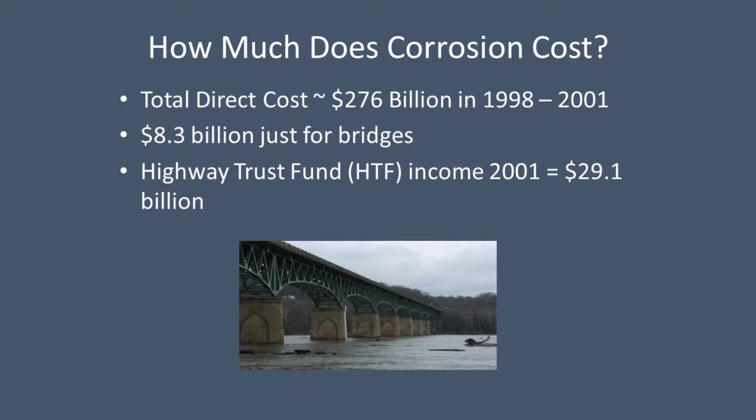So first of all, why are coatings important? Probably most people in this room have seen these numbers. Total direct cost of corrosion was somewhere around $300 billion between 1998 and 2001. Of that figure, $8.3 billion was just for bridges. My understanding is the Highway Trust Fund is about $30 billion, so some quick math there, you see that bridges are almost 30% of the whole trust fund. It's a big deal, and from a cost perspective, it gets very obvious why we're spending money here.

The scope of the domestic scan, what were we tasked to do? Let me back up just a second. This was an NCHRP scan tour sponsored through TRB. We had Federal Highway participate on the scan tour, and I'll get into that some more, but I wanted to give you the structure of the scan tour, who was behind it, who funded the collaboration. Essentially that was the Academy of Sciences, Federal Highway, and the TRB.

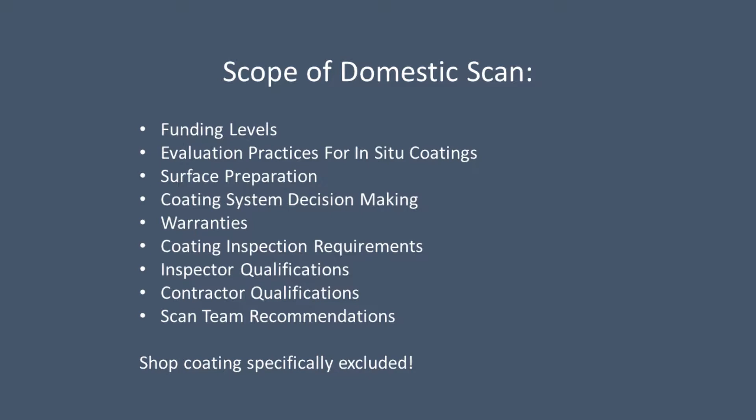So anyway, the scope of the scan, what were we looking at? We were looking at funding levels, evaluation practices, surface preparation, coating decision-making, warranties, coating inspection requirements, inspector qualifications, contractor qualifications, scan team recommendations, and we specifically excluded shop coating.

I don't even remember why, but it makes sense to me. Shop coating, it's the lower fruit is the maintenance painting. At least in Florida, we're getting pretty good service lives out of our shop painting. It's the maintenance painting that this scan tour was focusing on.

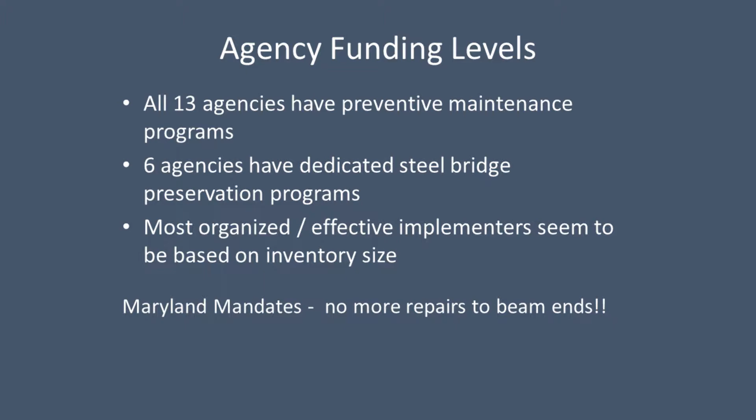So the first topic, agency funding levels. All 13 agencies have preventative maintenance programs in place, not a surprise. Six agencies have dedicated steel bridge preservation programs. The most organized and effective implementers seem to be the ones with the biggest inventory. Kind of common sense, actually.

Maryland has mandated no more repairs to beam ends. I'm not sure how it's good to mandate it, but did they get there? I don't know, we'll have to ask someone here from Maryland, but that was one of the things they were trying to accomplish during the scan tour, which was about two years ago.

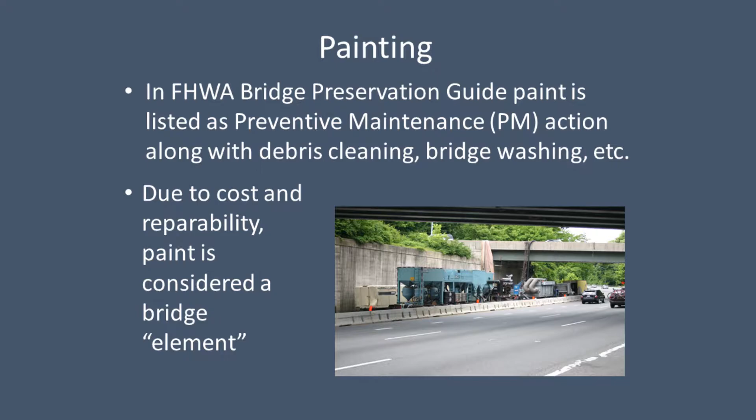Painting: due to the cost and repairability, paint's considered a bridge element. That's surprising to me, I did not know that prior to the scan tour. In the Federal Highway Bridge Preservation Guide, paint is listed as a preventative maintenance action, along with debris cleaning, bridge washing, etc.

So what practices were out there for in situ coatings? Well, all state highway agencies performed assessments prior to making any maintenance decisions by following the National Bridge Inventory regulations. It's required every two years that the bridges have to be inspected, with biannual in-service bridge safety inspections done by all the agencies that participated.

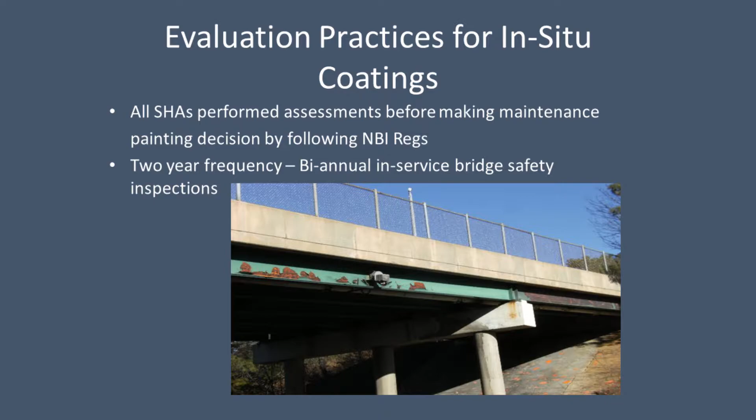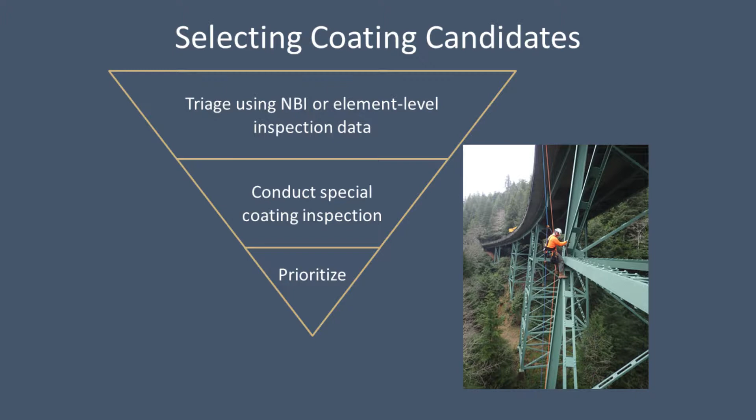How did they select coating candidates? Well, they used triage via the National Bridge Inventory or element level inspection data, conducted special coating inspections, and then prioritized which structures were worst and how much money they had.

So first of all, the element level inspection data. This was an important nugget - some of the agencies were very detailed with their inspections. They had element level ratings across a bridge. Instead of an area or even a whole bridge, they were rating individual elements, putting them on the plans, and using that information to make maintenance strategy decisions.

So Oregon rated the condition of the entire superstructure coating system on an element by element basis. It was impressive.

Virginia, the condition of the beam ends and beam end coating systems - just different ways different states approached things.

Overcoating was one of the topics we discussed in the previous presentation. The general gist was that most agencies are moving away from it due to environmental and safety regulations, cost advantages, and the amount of risk. I remember one statement: if you're going to have to do containment, then your cost is going to be almost the same as doing a full removal and replacement anyway.

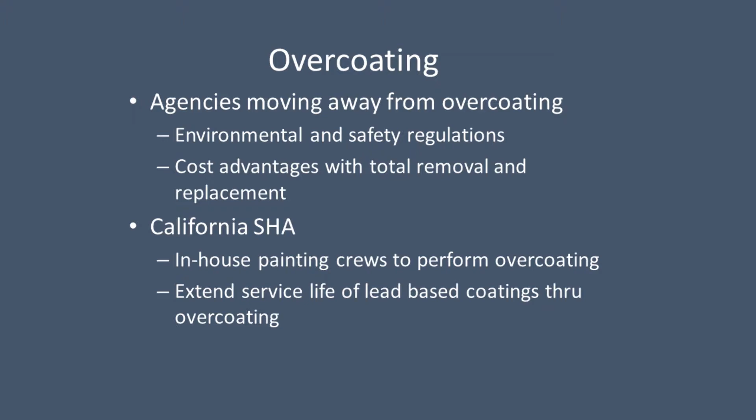California, Caltrans, had one thing very different than anybody else in the Scan Tour - their lead-based coatings. They were doing their best to extend the life of their lead-based coatings. They figured it's better to leave it in place and let it work as long as it'll work before removing it. Can't argue the logic.

It was unique - they are also using in-house painting crews to perform overcoatings, and Caltrans formulates their own paint.

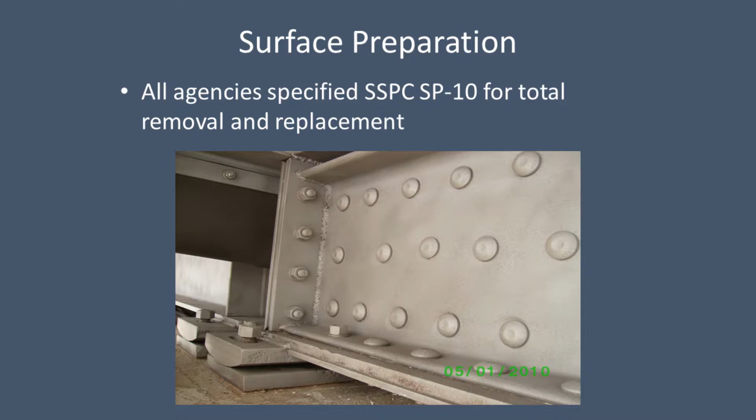Surface preparation: all agencies specified SP10 for total removal and replacement. Across the board, everybody participating used SP. It varied for spot and overcoating. All used Guide 6 for containment. No big surprises.

This is another nugget that really came out of the Scan Tour that, at least to me, appeared to be very beneficial - Oregon was using ultra-high pressure washing to remove pack rust. They're getting into their bridge bearings and things with ultra-high pressure water to knock out the pack rust and get the salts out of it prior to any other surface preparation. From the pictures we saw and the results we heard about, that was a very successful practice.

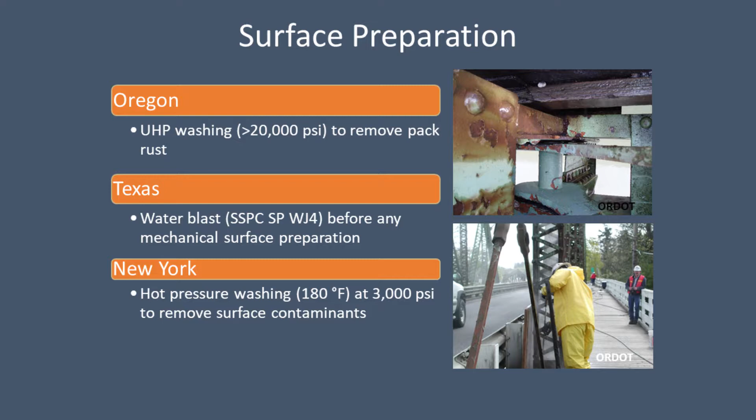Texas is water blasting before any mechanical surface preparation, and New York is actually using hot pressure washing at 180 degrees Fahrenheit to remove surface contaminants.

So how do you do the coating option decision making - what are we going to do, what coating system do we want to apply to this bridge? Well, nationally, the 3-coat zinc-rich primer is the workhorse. That was very evident from the Scan Tour, that that's predominantly what's being used across the country.

There was talk about ultra-weatherable coating systems - your siloxanes, your polyureas, your fluoropolymers, and several others out there. The team was more or less frustrated that there seemed to be new technologies out there that had not been well vetted, and we just didn't know whether we could use them or not. They weren't tested in laboratory or field testing, and even though the rumors on the street are that these coatings are very, very good, it's hard to specify one without a good independent lab evaluation.

Metallizing - New York and Ohio have been doing metallizing for many years. They seem to be ahead of the rest of the pack. They had good results and reported good things to the scan team.

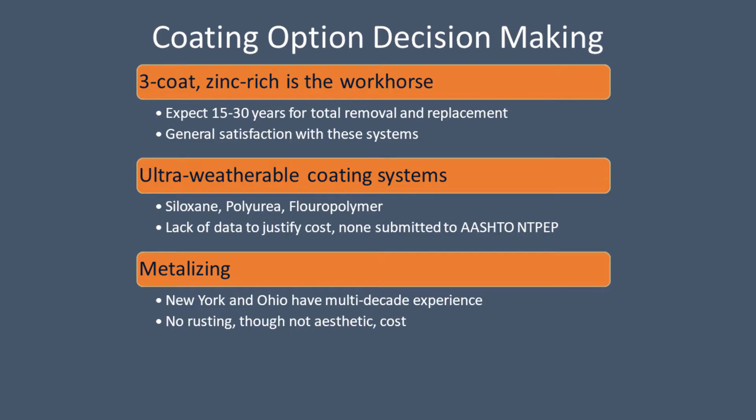No rusting, and some of these were not being top coated - just metallizing the steel and not putting a duplex system was not applied. So that's why it says not aesthetic.

Warranties were another one of those nuggets that came out of this, that seems to be a very good contractual mechanism or tool to help ensure quality.

I don't know if warranty, Jeff, does warranty fall into QA or QC or both? Well, basically, it's all QA, QC, but the thing is the warranty is the contractor exhibiting a certain amount of confidence, and he's buying into it, therefore hopefully getting a better project. Yeah, the contractor's taking on responsibility, yes. And I was kind of leading you on, but I thought it's both. It is both - it's contractor quality control and owner quality assurance, both.

Here's the states: Maryland's using a 2-year warranty, about 25% of the total project value. Oregon was using a 3-year warranty, 90% of the coating line items. The Golden Gate Bridge Authority had a 5-year warranty, and Ohio had used a 3-year warranty in the past.

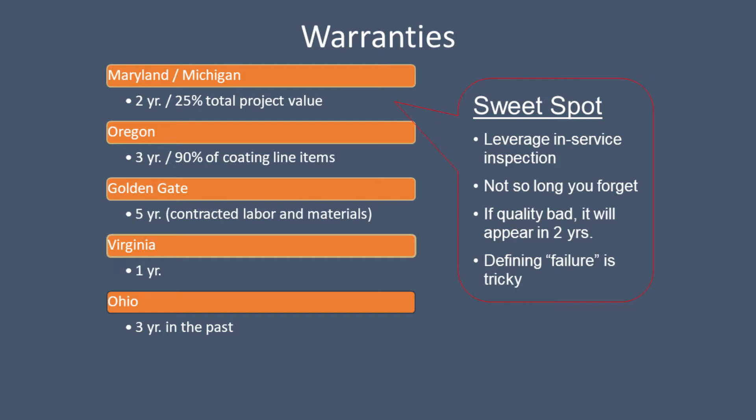Now, talking to the scan team, the sweet spot was agreed upon to be about 2 years. It leverages in-service inspection - it's not so long you forget about the structure, but yet it's quick enough that you can get out there. It is long enough so that you would expect to see premature failures if there was something wrong.

Warranties require the agency to get out there and inspect before the warranty expires. That was one of the challenges - which agencies have personnel to just track warranties. I think Mr. Blanchard said this morning we have 12,000 bridges, so think if you had 12,000 warranties, or even some proportion of them, you're talking about a significant manpower investment.

So be it. Maybe that's a good thing. You know, maybe that needs to be done. But...

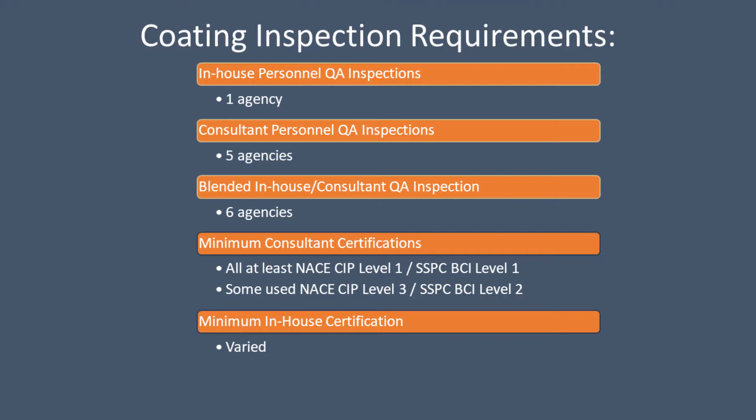Coating inspection requirements: in-house personnel QA inspections, 1 agency. Consultant personnel QA inspections, 5 agencies. Blended, 6 agencies. Minimum consultant certs, all agencies required some level of consultant certifications, NACE CIP or BCI, SSPC, BCI being the 2. And then minimum in-house certification, that just varied by agency.

Coating inspection requirements, hold points. That's sometimes, a lot of times, overlooked. One of the things the scan team felt is that hold points should be maximized and utilized to ensure quality, 100% QA inspection. In other words, get out and do your 100% inspection before your contractor demobilizes. Once the contractor's demobilized, you think he's coming back out? Not likely. So get your 100% inspection in prior to your contractor demobilizing.

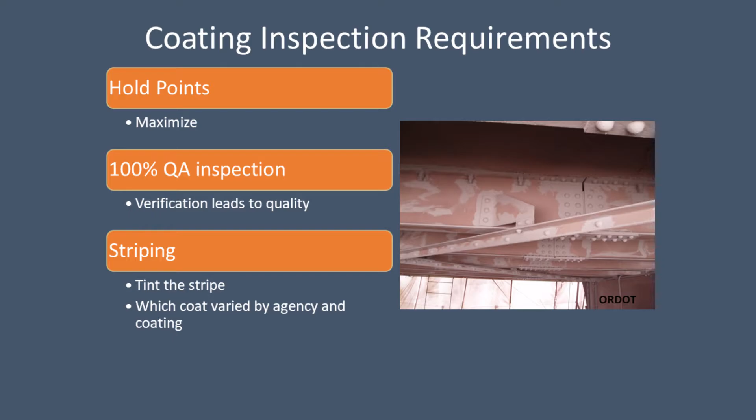Stripe coating was another one. Some agencies weren't stripe coating. Some are stripe coating the primer. Some are stripe coating all the coats. But in general, what came out of this was that the stripe coat needs to be tinted so you can get a contrast and inspectors can clearly tell that the stripe coat's been applied. Which coat varied by agency and coating. The scan team didn't really like wet-on-wet stripe coating, felt that was not a good practice.

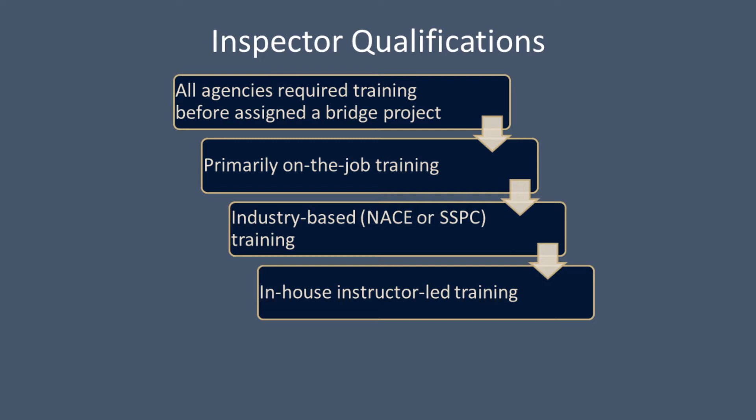Inspector qualifications: all agencies required training before going out on a bridge project, primarily on-the-job training and industry-based, being NACE or SSPC, and in-house instructor-led training. Contractor qualifications: 9 agencies required QP1 and QP2, 3 agencies required QP3, 1 did not require QP at all, and 1 agency allowed SP7, or QP7, I'm sorry.

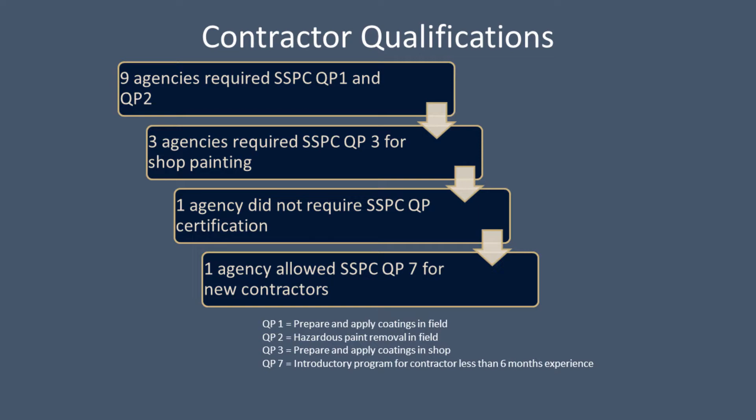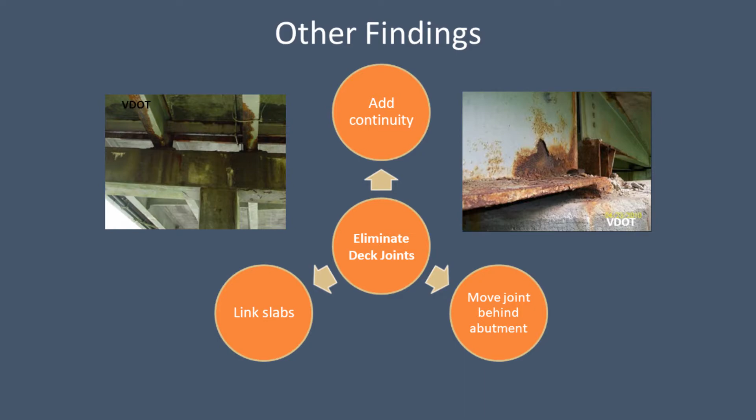What else did we see? Well, I believe this came out of Maryland also, but eliminating deck joints - maybe it was Virginia, somewhere in the mid-Atlantic. Anyway, eliminating deck joints, and that's been in 2 or 3 of these discussions already today. The fellow from Alabama said it was the bane of all preservation engineers' existence. And so Virginia is right on cue there - eliminate deck joints wherever you can.

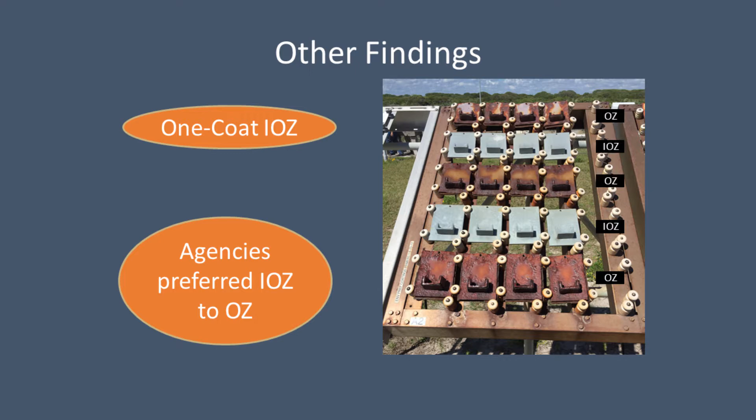One coat IOZ system - this system touted by NASA for years. I've seen their test panels and things. I've been out to the NASA beach test site, I've been to their launch pads, and it does very well. Untop-coated IOZ certainly outperforms a 3-coat IOZ system. This is just a picture of some of those panels. Agencies seem to prefer IOZ to OZ, inorganic zinc to organic zinc.

And the scan team recommendations. So what were they? Well, agency funding levels - you've got to have a dedicated bridge painting fund. If you don't have a dedicated bridge painting fund, you've got to get that settled with management. I guess it's fine if you don't have any bridges.

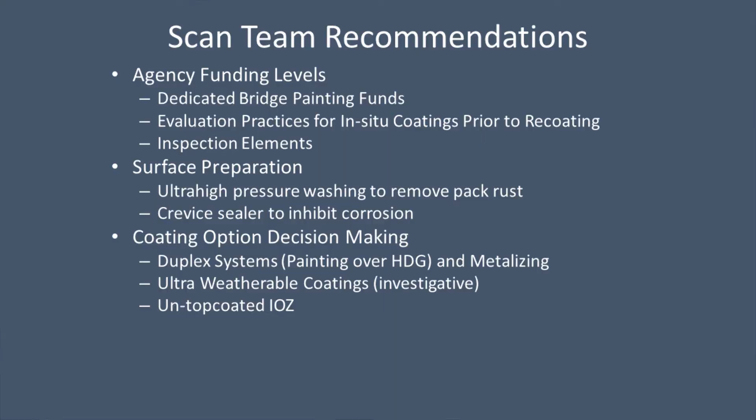Evaluation practices for in situ coatings prior to recoatings - how each person that goes and does an assessment can come back with a different result, so you need to have some consistency. Your inspection needs to be element specific. Surface preparation: use ultra-high pressure washing to remove pack rust, crevice sealer to inhibit corrosion. And coating option decision making - duplex systems and metallizing, ultra weatherable coatings, and untop-coated IOZ - those were the 3 top systems deemed by the scan team.

Continued use of performance-based contracts, the warranties, specification language - the warranty's no good if you don't define what a failure is. So you've got to specify in your contract: is 1% corrosion enough to void your warranty? Is 1% delamination enough? It's got to be in the contract. Otherwise, your warranty is worthless.

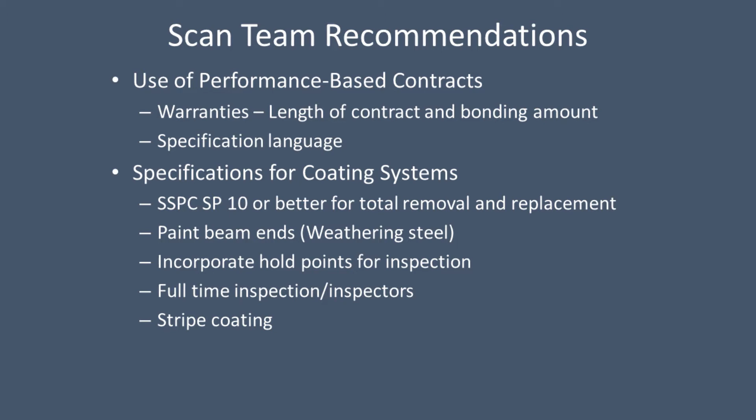Specifications: SP10 for surface cleanliness, paint the beam ends, incorporate hold points, full-time inspection, and stripe coating. Quality control inspection: NACE CIP and BCI. QP1 and QP2 for contractors. Agents, essentially, to me at least, those come down to training - are our inspectors trained? Are our contractors trained? Have they passed certain industrial or industry criteria to show that they're proficient? That's what these qualifications and certifications are about.

Agency commitment - that's the bridge funding again. If you don't have a dedicated bridge maintenance fund or painting fund, then what, are you begging for money every time you need to paint a bridge?

Tracking coating information - it was amazing to me, and I would throw Florida a little bit under the bus here, many of the agencies aren't tracking the coating systems they're putting on their bridges very well at all. You go and walk up to a bridge that was painted 10 years ago, no one can tell you the surface cleanliness that was specified or what coating system was put on it. I know they're doing better in the Northeast, I've seen the stencils on the bridges, and however you do it, it's important and a great idea.

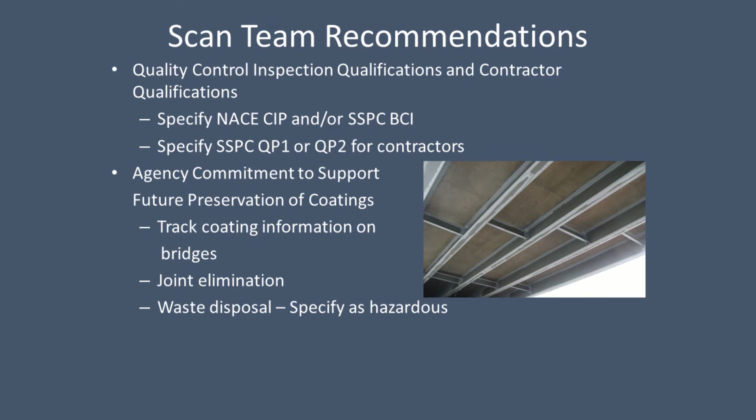Joint elimination, we mentioned that. Waste disposal - this was another little nugget I learned out of the scan team. The states felt like, and the agencies felt like, it was just better, and many of the states were already doing it - they're disposing of all their waste as hazardous.

They're just not messing around with it. They're saying the cost was about the same anyway, and that it reduced risk. So they're just disposing of everything as hazardous waste.

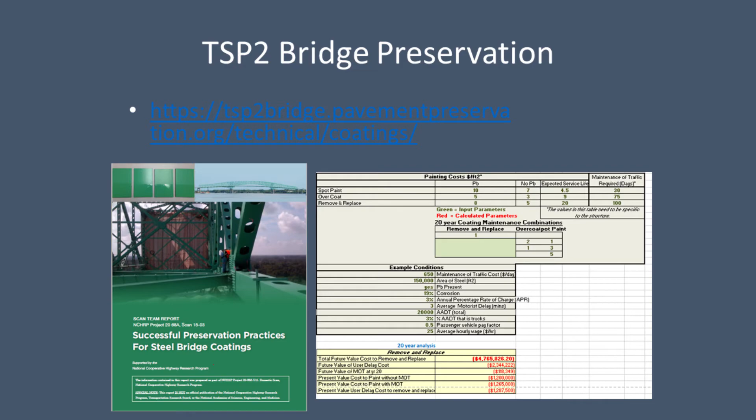Last slide, well, second to last slide, but this is the web page for the full SCAN tour report from the SCAN team, if you're interested. I thought I'd also plug this costing spreadsheet that Jeff and I put together. It goes through the different iterations of whether, over a 20-year life cycle, if you paint a bridge the first time and then overcoat and then spot paint, it provides a life cycle cost analysis based on the time value of money and predicting things out based on interest rates, and it incorporates the user costs as well. So the cost to the motoring public is included.

And Jeff, that's not uncommon in the maintenance engineering world, is it? Do you guys normally include that cost in this kind of analysis? Which cost is this again? The user costs. Yes, we do. I thought so. Yes. So that's at your disposal too.